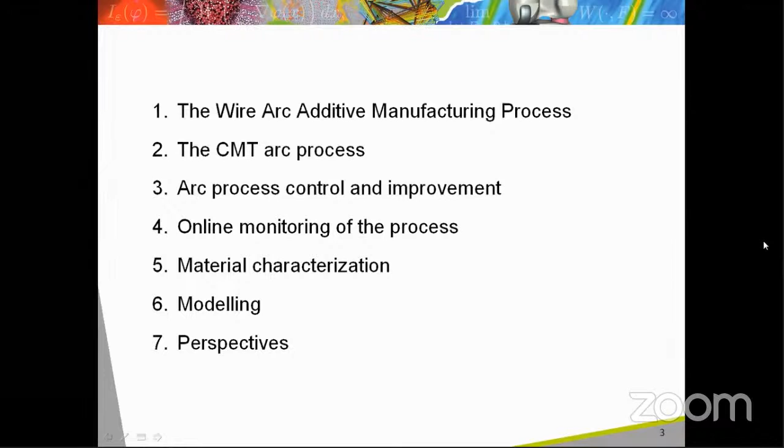So the first part is dedicated to a general presentation of the wire arc additive manufacturing process.

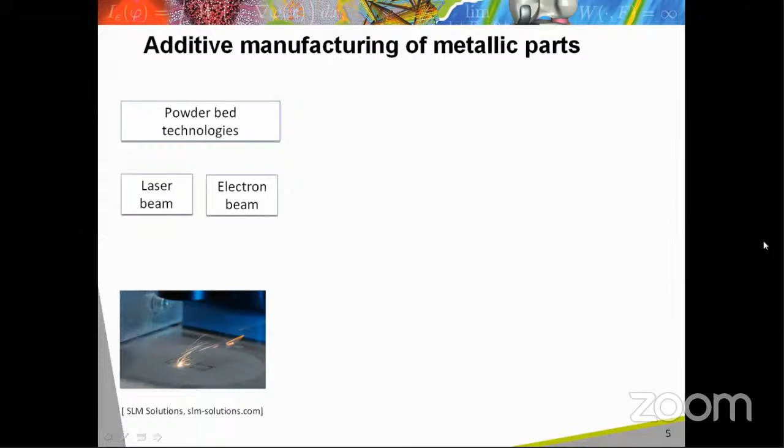Here is a presentation of the main additive manufacturing processes dedicated to metallic materials, classified considering the state of the used raw material and the heating source. The powder bed technologies, based on the deposit of successive powder layers locally melted or sintered by a laser or an electron beam, are probably the most used. Other techniques are based on the spray of powders that are melted by a heat source, generally a laser or plasma.

The wire-based technologies have been less developed so far. With these technologies, a metal wire is melted using a laser, or, in the case of the WAAM process, using an electric arc.

In a general way, the WAAM process does not allow the same precision shapes of the manufacturing components as the powder bed technologies. However, it presents some advantages compared to the other additive manufacturing processes.

First, there is no technical limit to the size of the manufactured samples because there is no manufacturing chamber with it. For comparison, the powder bed technologies are limited to the manufacture of components not exceeding about 400 mm size, and the spray technologies are limited to component size of about 1 meter long.

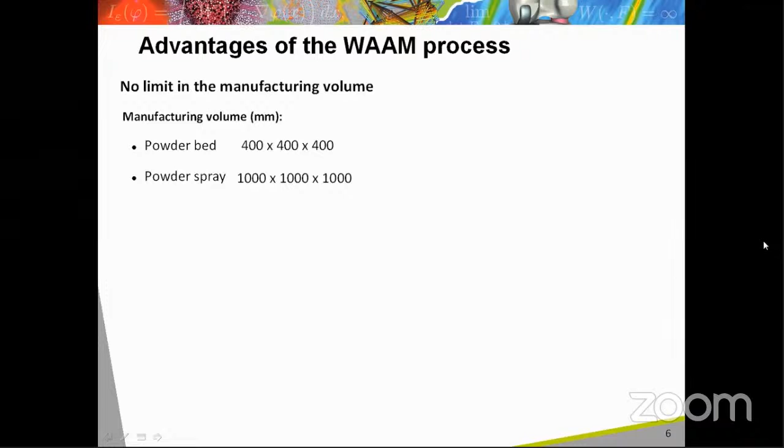In addition, as this process uses the same raw material as the welding process, a great number of material grades are available. The wire raw materials are also less expensive than the powder raw materials.

Finally, the wire arc additive manufacturing process offers some advantages due to the massive shape of the filler metal that does not present the safety problems and the storage problems of the powder-shaped materials that can be easily inhaled or polluted.

One can see on this video the deposit of layers of an aluminum alloy with the WAAM process.

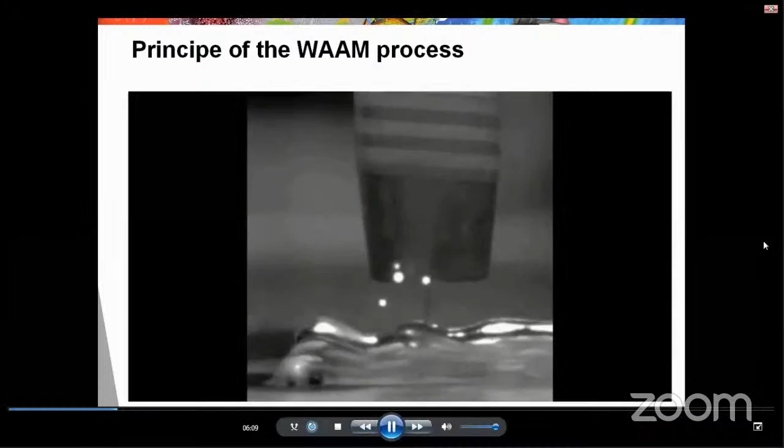The WAAM technology is composed of three main elements: the wire feed device that allows compensating the melting and deposit of the wire end, the arc control process, and finally the 3D positioning or moving device of the deposit head.

As was said previously, the wire feed device and the arc control process in the WAAM process are similar to that used on arc welding processes.

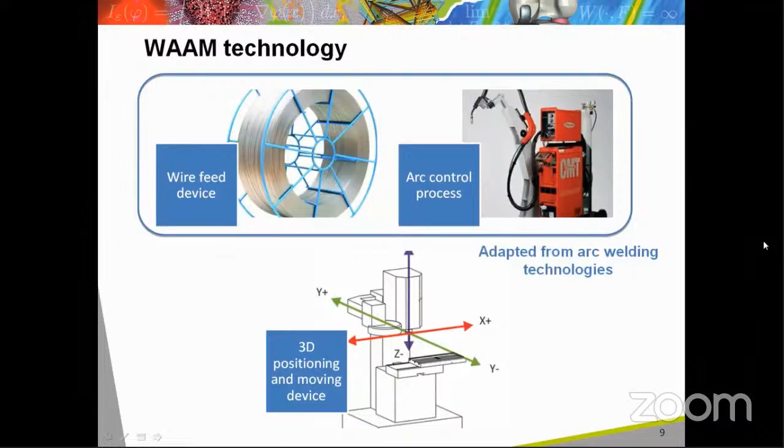In this picture, one can see some examples of components for which the WAAM process is of interest. These kinds of shell shapes are difficult to obtain with conventional processes, or rather costly. So the WAAM process is a convenient process for manufacturing shell structures with complex shapes, having a thickness up to about 10 millimeters, which is the maximal thickness of the layers that can be deposited with this process.

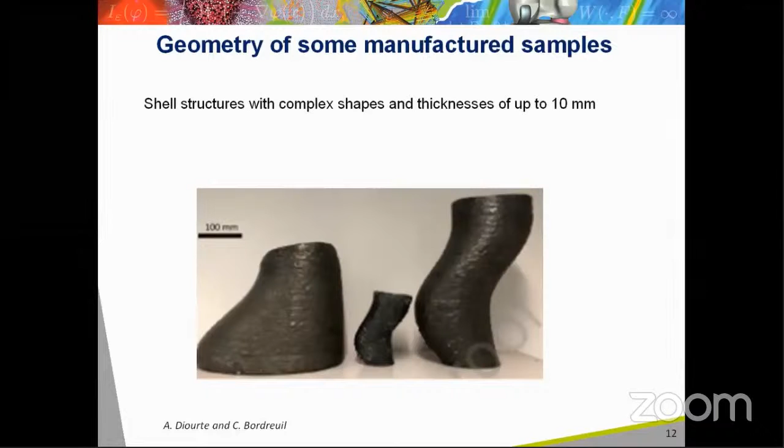I will now present the CMT arc process, which is a welding process retained for our WAAM devices. The CMT process is a derivative process of the classical metal inert gas, or MIG, welding process, also called gas metal arc welding process.

With this process, a filler wire is automatically fed and its end is melted using an electrical arc created between the wire tip and the welded samples by a welding generator.

According to the wire diameter and the arc power, various melting modes corresponding to different metal transfer regimes can be observed. When the arc power is low, the wire tip melts slowly and the wire, which is continuously fed, enters regularly in contact with the melt pool formed at the surface of the welded samples, creating a short circuit and the arc extinction.

This transfer regime is called short circuit mode and is a stable mode because the formed deposits are rather regular. When the arc power increases, the melting of the wire tip is faster and some large liquid droplets are sprayed, producing spatters and sometimes irregular deposits. This transfer regime is called the globular mode.

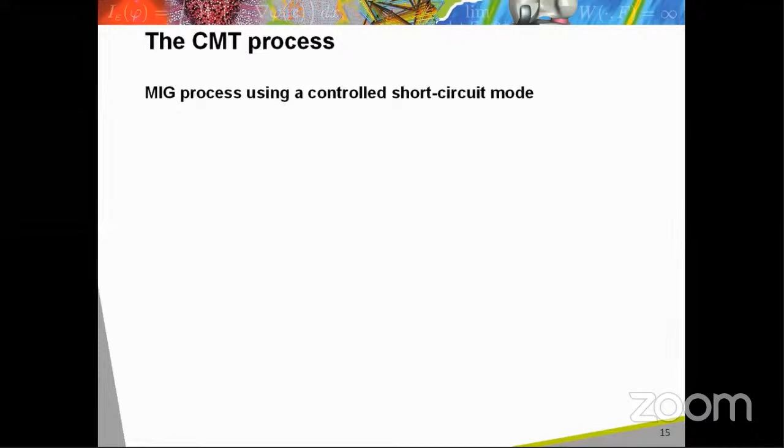This process is considered a MIG process using a controlled short circuit mode. With this process, droplets of liquid metal are deposited according to a regular cycle comprising 4 main steps. The filler wire is fed or retracted according to the step in the deposit cycle.

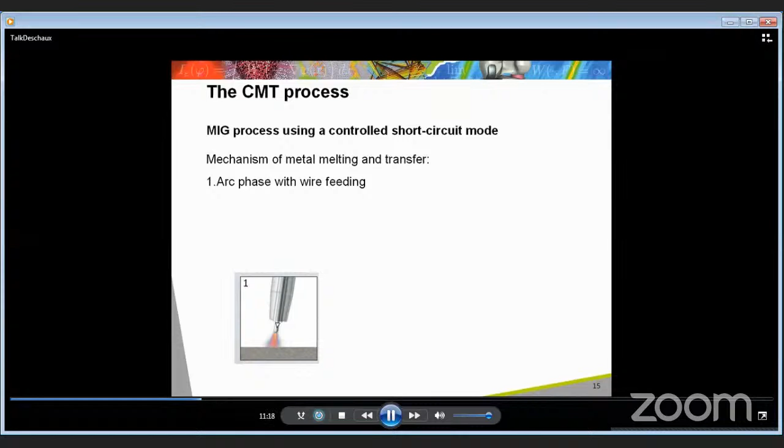In the first step of the cycle, the arc melts the wire tip and the wire is fed towards the workpiece. Then, the liquid drop formed at the wire tip enters in contact with the workpiece surface, producing a short circuit on the arc extension.

In the third step, the wire is retracted up to its separation from the workpiece, leaving the drop of liquid metal deposited to solidify on the workpiece. Finally, the electric arc is reignited and a new cycle begins.

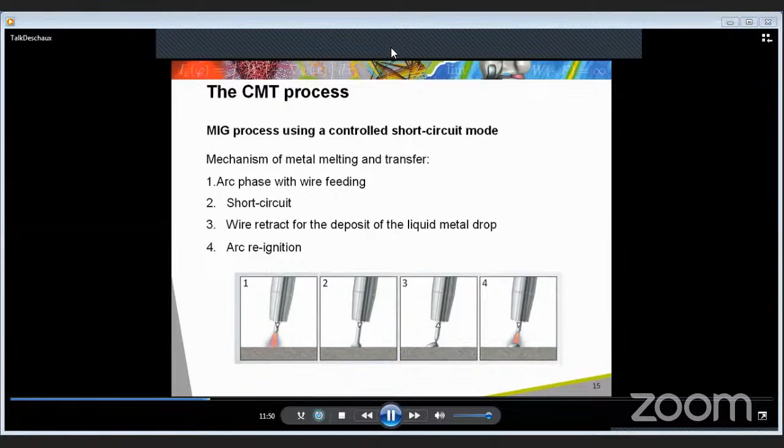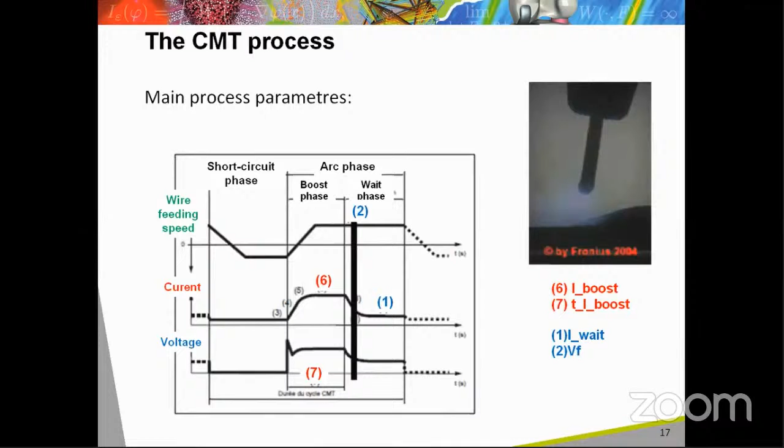One can see again on this slide the 3 phases of the CMT cycle and the main process parameters controlling them. The boost phase is mainly controlled by the boost current, I-boost, and the pulse duration, T-boost. The wait phase is mainly controlled by the wait current, I-wait, and the wire feed rate, VF.

Finally, the short circuit phase is controlled mainly by the short circuit current, ISC, and also by the retract speed of the wire, depending on the feed rate, VF.

I will now present some results concerning the optimization of the process parameters in order to improve the deposit's characteristics.

The optimization of the process parameters requires a good knowledge of the effect of the various process parameters and their coupling on the melting phenomenon, on the liquid metal transfer, and on the spreading on the already formed deposit.

In order to study the stability and regularity of these phenomena according to the process parameters, two kinds of data are recorded during the process. Video recordings are obtained using a high-speed camera.

An ombroscopic technique has been used to observe the deposited metal shape through the electric arc. For that, a halogen light is placed behind the wire tip, allowing observation of the contour of the deposit despite the arc radiation. In addition, the electric parameters, voltage and current, are recorded with a high acquisition frequency to follow the stability of the different phases of the CMT cycle.

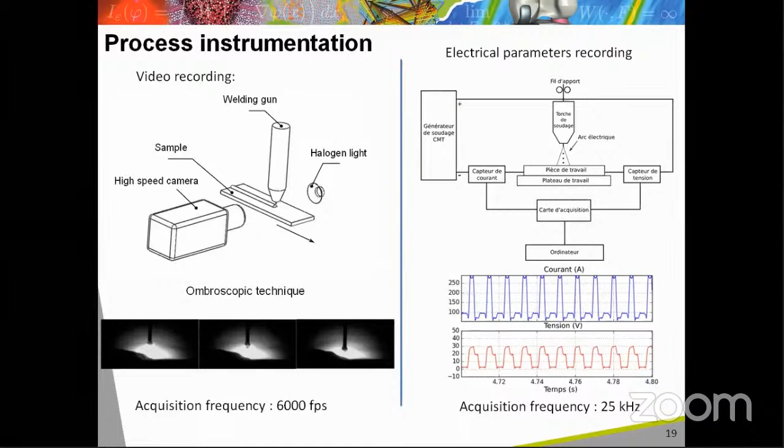The process parameters can act on three main kinds of characteristics of the deposit. First, they act on the geometry of the deposit, which can be evaluated, for instance, by its thickness, its height, but also by the wetting angle.

Secondly, they act on the deposit rate, which can be increased to decrease the manufacturing time. And finally, they act on the stability of the deposit cycle, which can act on the regularity of the deposit shape.

The first example of process parameter optimization that I will present concerns a study focused on increasing the deposit rate. The first option to increase the deposit rate consists of increasing the wire diameter.

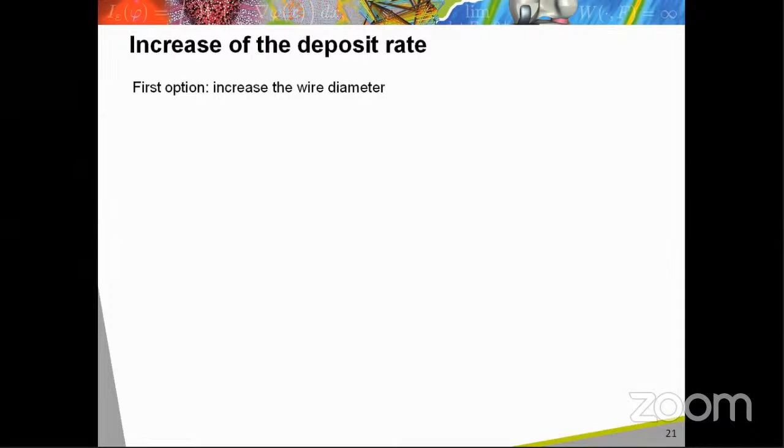For some current materials, the welding devices allow use of wire up to 1.6 mm in diameter. However, these wire sizes are not available for all materials, the standard diameter of the wire being 1 or 1.2 mm. The second option consists, of course, in optimizing the process parameters.

The deposit rate depends on many factors, such as the wire feed rate, the current of the various phases of the transfer cycle, or the duration of these phases. However, two factors were identified as having the greatest influence: the intensity and the duration of the boost phase.

The value of the boost phase current can be changed between about 20 and 300 amperes, and the duration of the boost phase can be changed between 0 and about 10 milliseconds.

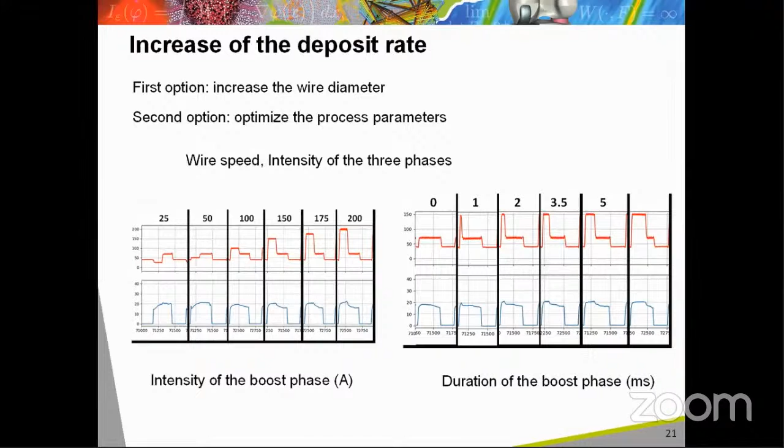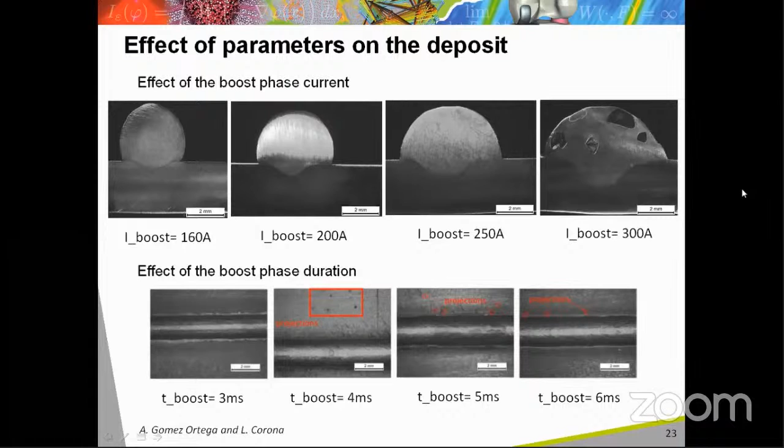Thanks to the optimization of the process parameters, a new synergic point has been added, allowing a deposit rate of more than 4 kg per hour. That corresponds to an increase of about 20% compared to the maximum deposit rate allowed with the pre-recorded parameters.

I will now present another issue that required an optimization of the process parameters. It concerns the reduction of geometrical flaws frequently observed at the beginning of the deposit, mainly in aluminum alloys.

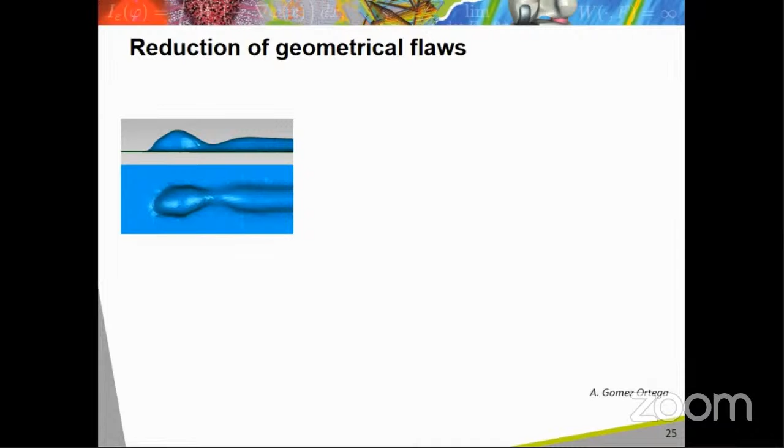Indeed, the pressure variation in the liquid deposit can be expressed with a Laplace equation that indicates the pressure in the liquid increases when the curvature radius of the liquid-gas interface decreases.

At the opposite, when the contact angle is below 90 degrees, then an increase of the bead height produces an increase of the curvature radius, and so a decrease of the pressure into the liquid.

This pressure decrease promotes the suction of the neighboring liquid having a lower curvature radius, leading to the formation of a narrow neck just after the beginning of the deposited bead.

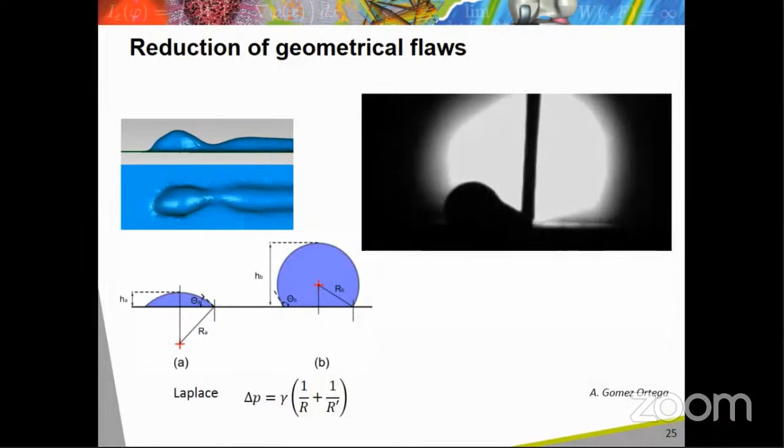This kind of defect can be reduced by improving the wetting of the liquid at the beginning of the deposit. This is possible by promoting the heating of the substrate at the beginning of the deposit using an optimized ignition cycle.

By imposing a high arc intensity during the ignition cycle, small droplets are formed at the wire tip and sprayed on the surface of the substrate. These small droplets produced by a high-power electrical arc have a very high temperature and favor the heating of

the substrate surface before the beginning of the CMT cycles, corresponding to the deposit of larger or less hot droplets. One can see on the video the melting and spray of these small droplets that create a very hot melt pool with better wetting of the substrate before the first short circuit at the beginning of the CMT cycle.

So the optimization of the ignition cycle allows a drastic reduction of the geometrical defect observed at the beginning of the aluminum alloy deposit, as shown on this photo.

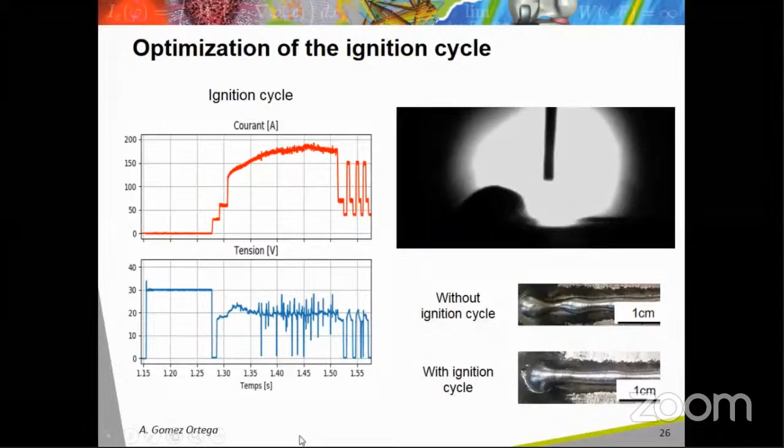The following part concerns some of our research work on the monitoring of the process in order to detect or prevent defect formation. The main goal of this research is to monitor the deposit characteristics in order to be able to adjust the process parameters in case of process deviation.

For that purpose, two kinds of data recording previously described can be used to develop methods based on image analysis or on the treatment of electrical signals of the arc. When a process deviation is observed, two strategies can be followed to adjust the process: the first is to modify the building strategy, adjusting the trajectories of the welding torch; the second is to change the arc process parameters, corresponding to the main CMT parameters previously discussed, or the travel speed of the welding head.

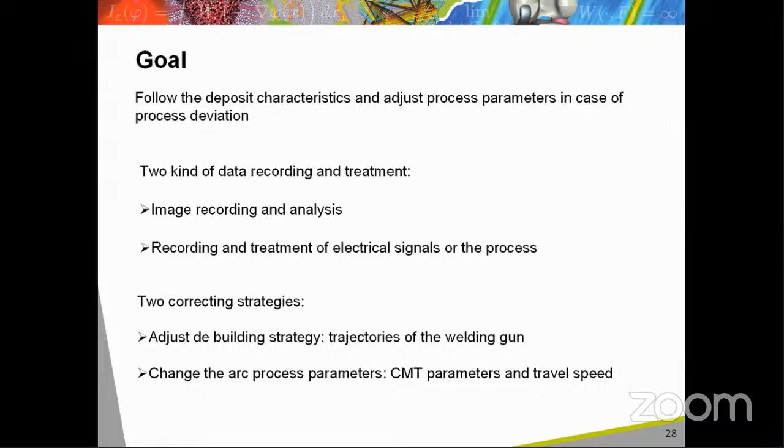I present here a method developed by image analysis to follow online the geometry of filar structures obtained by the superposition of semi-spherical beads. For video monitoring of the process, two cameras are used, positioned as indicated in this picture. The first camera monitors the location of the center of each new deposited bead, and the second is used for contour detection of the surface of each new bead.

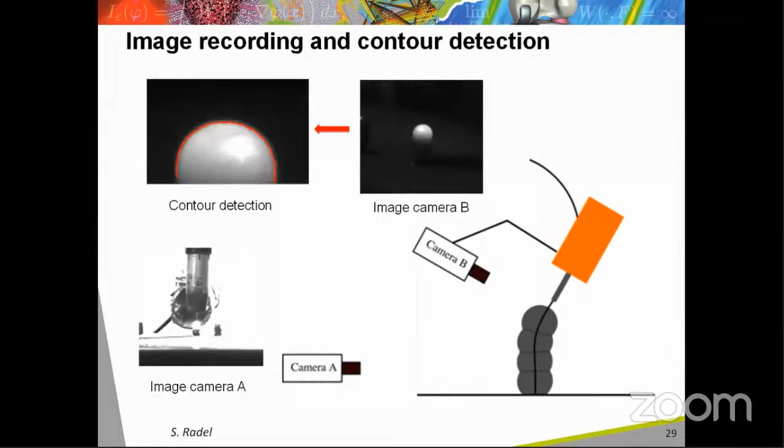Based on this monitoring system, a retroaction loop has been developed to adjust the building strategy in real time. The real bead contour obtained is first compared to a predicted contour, and a real-time retroaction loop has been computed for repositioning the welding gun at each new deposit.

In this video, we can see the real construction and the predicted one for a complex filariform structure. Note that the build speed is greatly accelerated on this video; the real manufacturing time of this component is about 8 hours.

Image recording, unfortunately, is not always a convenient technique, especially for building massive structures, where contour detection is not possible. In addition, the data recorded are often too large for real-time and online control of the process.

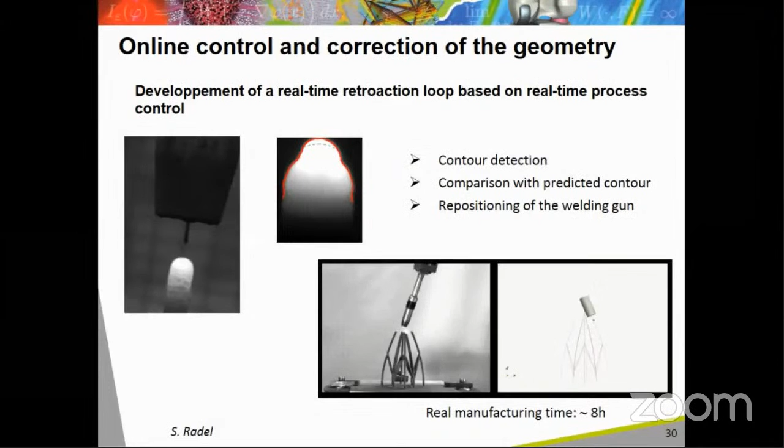A second strategy has been investigated for the online control of the process, based on the monitoring of the electrical parameters of the process. The current and voltage can be easily recorded, and the online treatment of this data is simpler and faster than for image treatments.

In order to try to detect geometrical flaws from the electrical recording, the three phases of the CMT cycle - the boost, the wait, and the short circuit phases - are automatically detected, and some parameters of each phase are computed, such as power, energy, duration, mean intensity, and mean voltage for each phase of each cycle.

These results were compared to the geometry of numerous deposits obtained with various process parameters. This work has shown that some of the computed parameters are good indicators of geometrical defects. In particular, the mean voltage of the wait phase and the duration of the wait phase seem to be correlated to the height variation of the deposits.

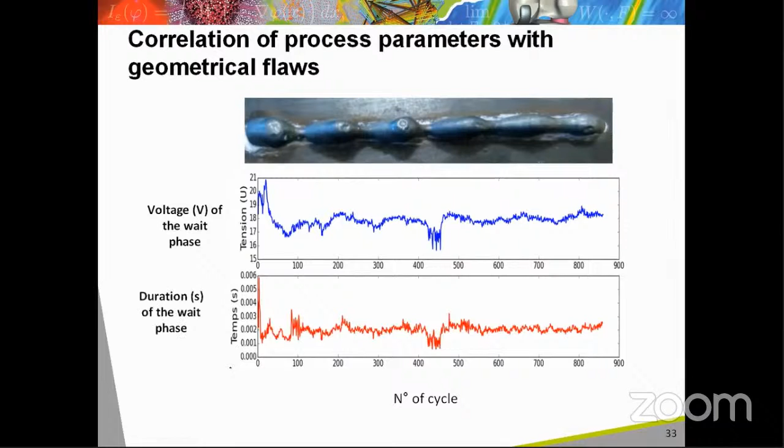These parameters can then be monitored in order to detect geometrical flaws on the deposit and to correct the process parameters when critical flaws are detected. For that purpose, a statistical process control method has been introduced. First, the control limits are defined as the process capability for a stable process without geometrical flaws.

Then control charts are computed to follow the stability of the process. A process is under control when the points of the control chart are inside the control limits. In contrast, a process is out of control when the points of the control chart are outside the control limits.

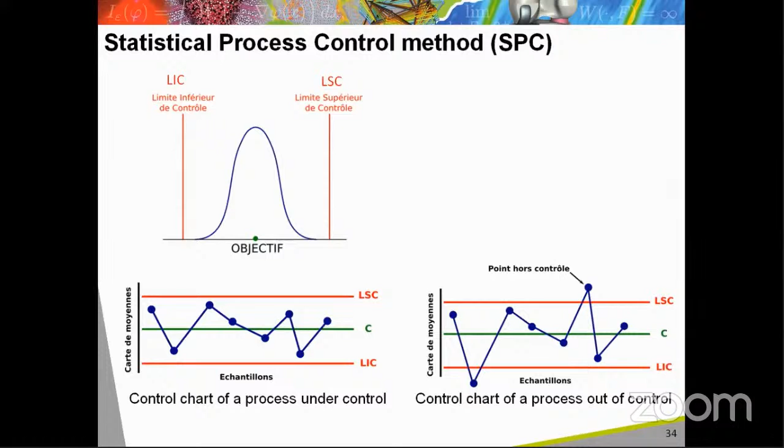This slide shows an application of the SPC method to the monitoring of the deposit of steel beads. Here is a control chart computed for the duration of the wait phase. This control chart indicates a process out of control, with several points of the control chart being below or above the control limits. This result is confirmed by the observation of the irregular deposit.

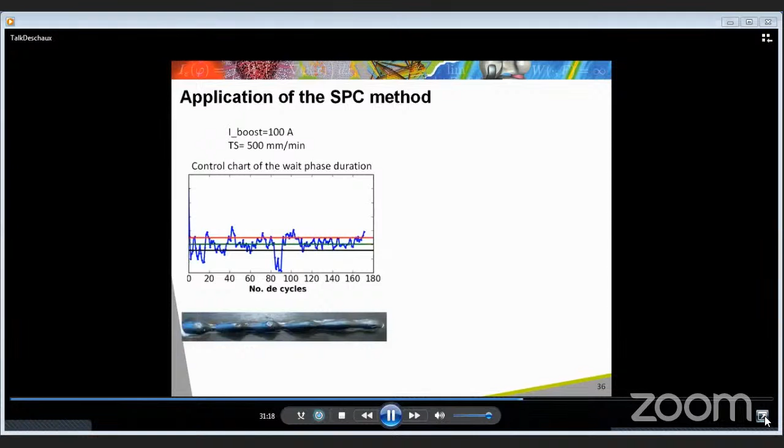This kind of height variation of the beads is generally due to a too-low arc current. For the next deposited layers, the current of the boost phase has been increased to 160 amperes, allowing the regularity of the bead to be improved.

The next section concerns the characterization of the produced materials. The microstructure of the materials obtained with the WAAM process and the corresponding mechanical properties are rather particular.

Indeed, the solidification processes imply specific microstructure and behavior: an out-of-equilibrium microstructure due to the rapid cooling, an anisotropic microstructure due to a directional solidification phenomenon with corresponding anisotropic mechanical behavior, inhomogeneous structures and mechanical behavior, and a low fatigue strength, mainly due to microstructural defects and residual stresses formed during the process. All these factors depend strongly on the process parameters and post-treatment.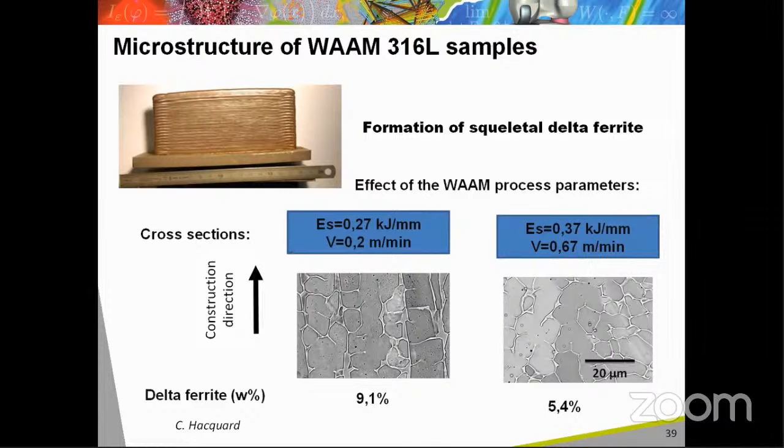The manufactured components in 316L stainless steel can sometimes be used in an as-built state, but generally heat treatments are applied on the components. These heat treatments can be stress release treatments at a temperature of about 550 degrees Celsius, or complete annealing treatments at a temperature of about 1100 degrees Celsius.

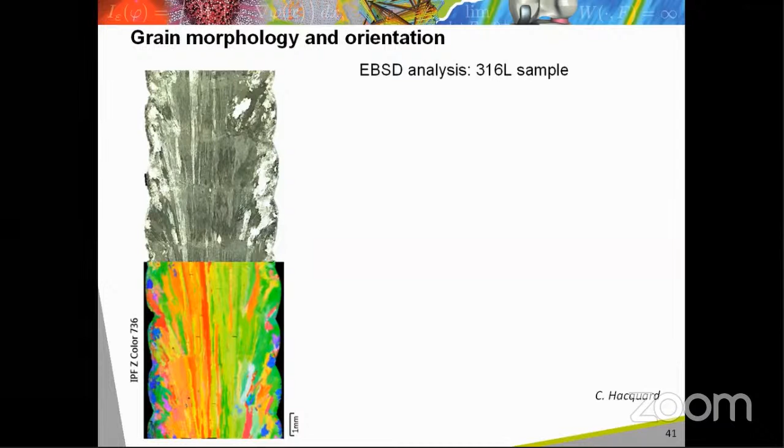Another specificity of materials obtained with the WAAM process is a strongly oriented grain structure. This is because the solidification is highly directional, as the thermal gradient is oriented mainly in the build direction. Consequently, the grains have a columnar morphology, as we can see on the picture on the left side of this slide. In addition, the growth direction for an FCC structure is the 100 crystallographic direction.

The material has a crystallographic texture, as shown in the pole figure obtained from EBSD analysis of the material. One can see on this figure that the 100 crystallographic axis of the grain is mainly oriented in the Z direction, corresponding to the build direction.

This material texture has a consequence on its mechanical behavior. One can see on this slide the tensile curves obtained on samples of titanium alloy TA6V produced with the WAAM process. The tensile behavior of the material differs depending on whether the tensile specimen axis is in the vertical direction, corresponding to the build direction, or in the horizontal direction, corresponding to the direction transverse to the building direction.

In the case of these materials, the yield stress is higher in the horizontal direction and the elongation is lower. This behavior can be correlated to the columnar grain structure, producing a higher strength in the direction of the grain thickness compared to the direction of the grain's length.

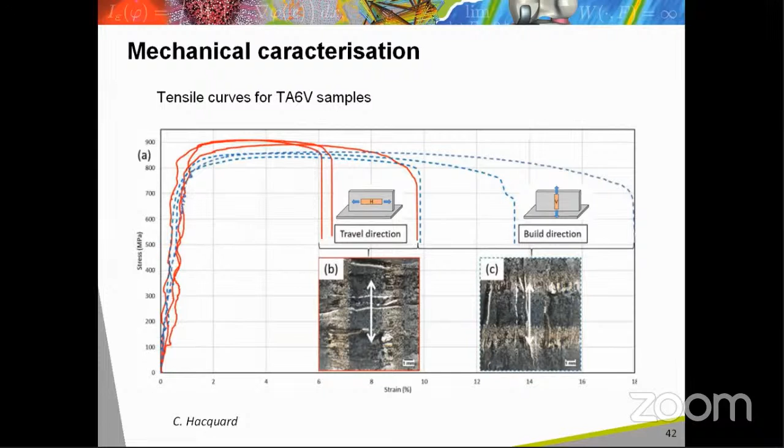In order to better understand the mechanical behavior of such samples, a digital image correlation method can be used. This technique allows comparison of the mechanical behavior of various areas of a heterogeneous sample by following the strain distribution of the sample surface.

Another mechanical property that can be unconventional in WAAM materials is the fatigue behavior. Some first fatigue tests were achieved on 316L stainless steel samples, and only the fatigue limit has been studied for the moment. To estimate this limit, a method based on the measurement of the heat dissipation of samples submitted to a given stress amplitude is used.

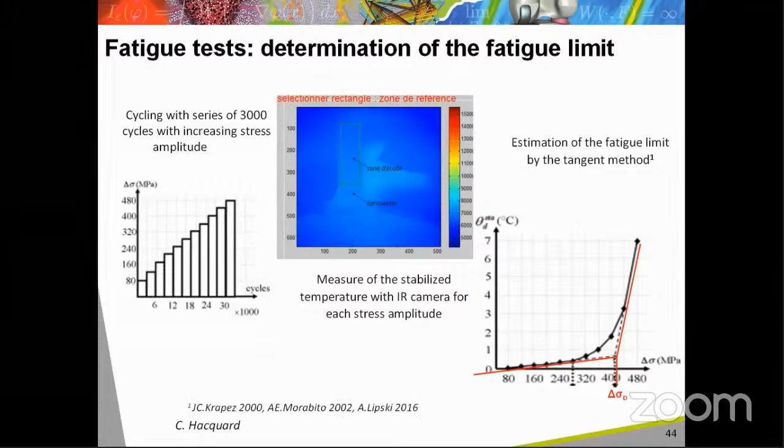The fatigue limits obtained with two WAAM process parameters on samples of 316L were compared. The fatigue limits in the build direction and in the horizontal direction were also compared. The obtained values for the fatigue limits are rather high compared to the yield stress of the material, or compared to some literature data on 316L materials obtained by conventional routes.

Despite a rather large dispersion of the results, one can see that the fatigue limit seems slightly higher on samples manufactured with a lower power. In addition, the fatigue limit seems better in the build direction than the horizontal direction.

Before finishing this talk, I will present some current studies concerning the numerical modeling of the WAAM process. The main goals of this numerical modeling are to predict the material characteristics and to reach a better understanding of the physical phenomena involved during the process.

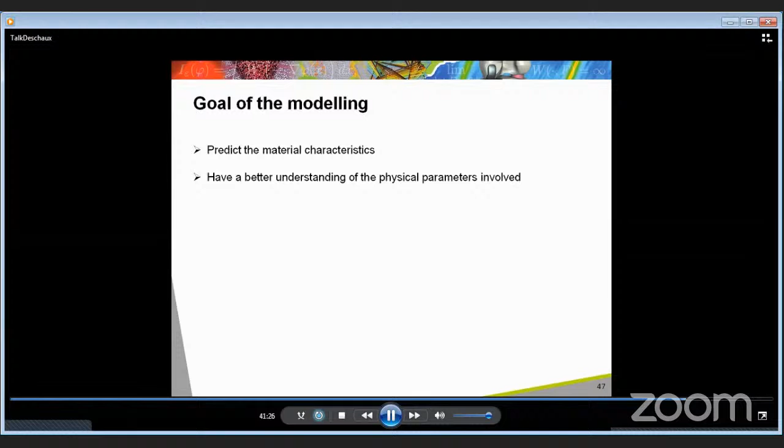Two kinds of results are expected in our current modeling work: the prediction of the formed microstructure in order to predict the anisotropic behavior of the material, and the prediction of the residual stresses and distortions in order to try to optimize the build strategy to reduce the stresses or the distortions.

Here are some first results concerning the modeling of the solidification grain structure obtained on a 316L stainless steel in additive manufacturing. These results concern the selective laser melting process, but the same kind of study is also in progress on the WAAM process with our French partners. For this modeling, the CAFE method is used, which couples a finite element method to predict the evolution of thermal fields during the AM process, and a cellular automata method to model the grain growth during solidification.

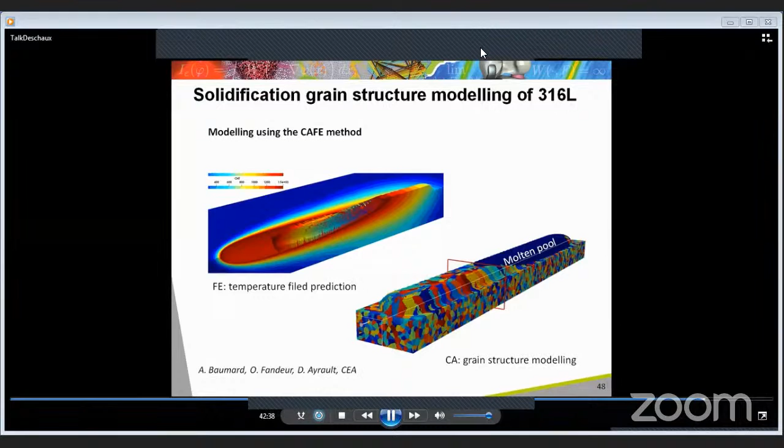Finally, we are also working on the numerical simulation of the residual stresses and distortions produced in WAAM. The main goal of this project is to develop a numerical tool allowing us to optimize the build conditions in order to reduce residual stresses and distortion.

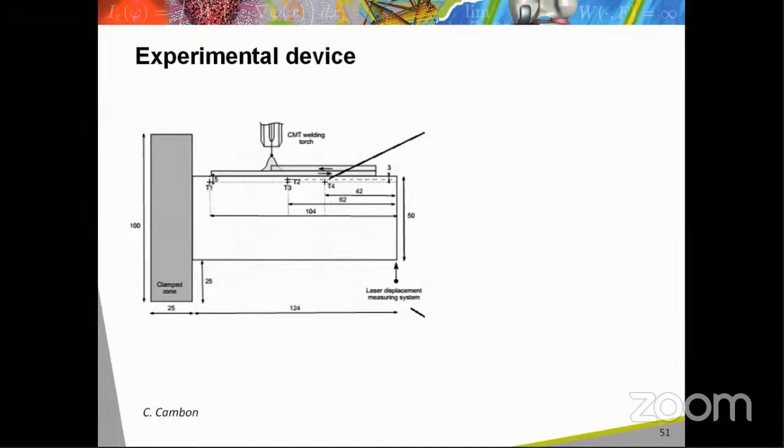To validate the modeling, an experimental device has been developed, consisting of depositing layers to form a wall on the edge of a steel plate. The experimental device is instrumented to measure, during the WAAM deposit, the temperature evolution with thermocouples and the displacement of the plate using a laser displacement measuring system.

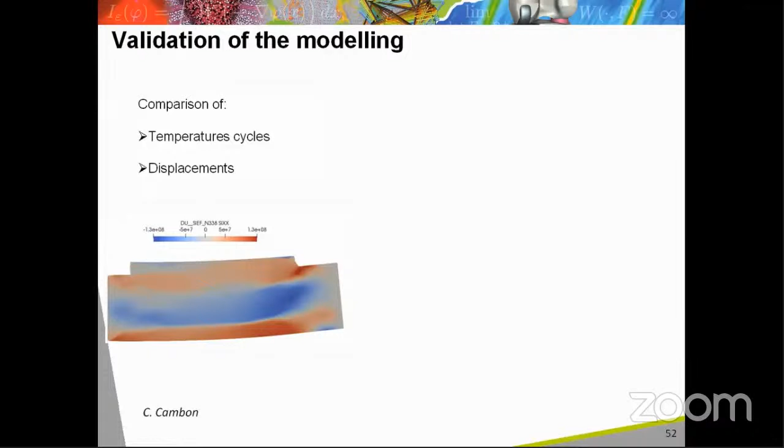In addition, residual stress measurements have been done by neutron diffraction. The validation of the modeling has been done by confronting the temperature cycles and the displacement evolutions predicted by the model with experimental measurements. Finally, the predicted residual stresses have been compared with the results of neutron diffraction measurements.

I will finish my talk with some perspectives of our current works. In the field of process control and improvement, we still need to improve our knowledge of the effect of each parameter of the CMT process on the mechanism of melting of the wire tip and on the deposit of the molten droplets. Concerning the online monitoring of the process, one can consider introducing the control chart method.

This is based on the monitoring and treatment of the electrical parameters in a real-time process, to develop a retroaction loop and correct process deviation.

Concerning materials characterization, it seems important to have a better understanding of the effect of the microstructure and its anisotropy, on the mechanical behavior, and on fatigue damaging.

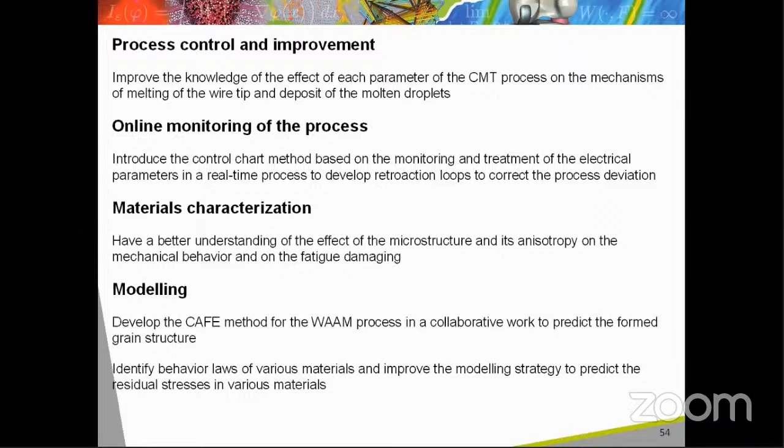Finally, in the field of modeling, we are working to develop the CAFE method for the WAAM process in collaborative work with several partners, to predict the formed grain structure. In addition, we need to identify behavior laws of various materials and improve the modeling strategy to predict residual stresses and distortion in various materials. Thank you for your attention.

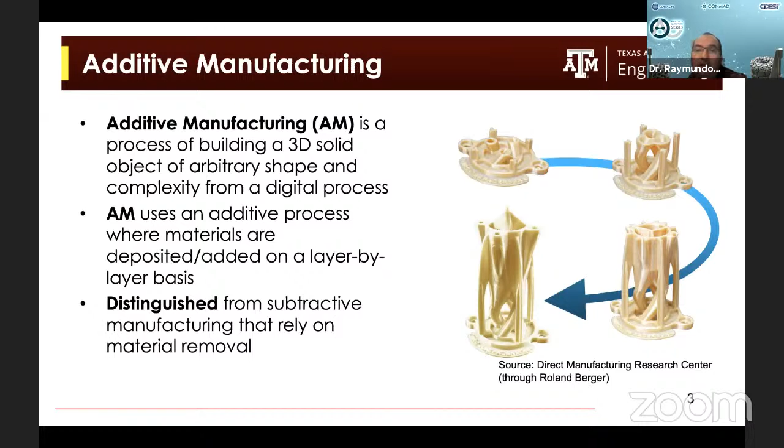Now, AM is distinguished from subtractive manufacturing because the latter requires the removal of material. And of course, when you're doing subtractive manufacturing, you are limited in the type of shapes that you can create, because sometimes there are internal features of the part that cannot be machined using traditional manufacturing processes.

So additive manufacturing has evolved from rapid prototyping to widespread use in some industries. Since the 90s, actually, when I was at MIT, they were talking about rapid prototyping. Some of the earliest printers were developed, or used, at MIT in the late 80s and early 90s. Actually, my advisor, one of his students, did one of the first e-beam printing of Inconel back in 1996 or 1997, if I'm not mistaken. So additive manufacturing has been having increased industry relevance and deployment in a wide range of applications, and it is actually poised to be a dominant manufacturing approach in the near future.

And there are different areas of application where the level of maturity is really high. For example, somewhere I read that in the future, all dental parts are going to be 3D printed. I don't know if all of them are being done by this method now, but in the near future, 100% of dental prostheses are going to be done with 3D printing.

I'm sure the same thing is going to happen with more industries as the case for additive becomes stronger, because they can either do things that otherwise would be impossible, or different additive techniques have been reaching or could reach economies of scale. So there are many benefits to additive manufacturing.

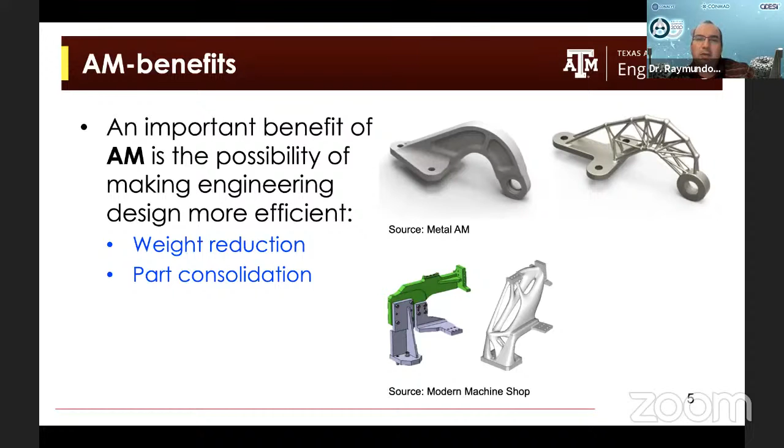The other advantage of additive manufacturing is part consolidation. If you can fabricate a part of complex geometries, you don't need to connect as many parts using joining techniques or fastening. This brings a lot of benefits, including a reduction in inventory if you have a maintenance shop, simplification of the design specifications, control over the parts in a big system, and so on.

Another advantage of AM, perhaps one of the major advantages, is that additional complexity comes mostly free. It's actually possible to fabricate components that otherwise would be impossible with other techniques. The cost associated with increased complexity is marginal relative to the benefit of having this complexity. For example, if you 3D print a jet engine blade, you can potentially print very complex and efficient internal cooling channels that would be extremely difficult to produce via casting.

Another benefit of AM is mass customization. By mass customization, I mean you can create and print objects and parts that are specifically made for a particular application, and you can make many of them. This is extremely important in biomedical applications where you have to print prosthesis to replace bone, for example. Everybody has a different configuration in their bone structure, so in principle you would need custom-made 3D printed bone replacement parts. You couldn't do this practically with other manufacturing techniques, but with additive manufacturing, that is entirely possible.

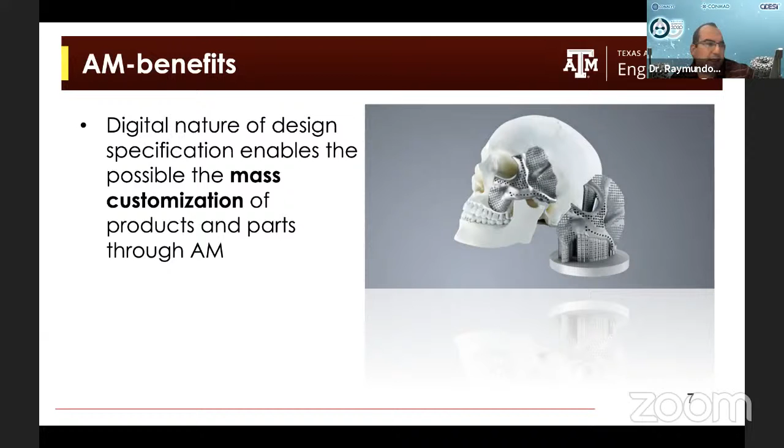The most commonly used ones—although in the morning we listened to a talk on wire-based additive manufacturing—but the most commonly used by industry, and the ones mostly investigated in a university setting, are powder bed fusion and directed energy deposition. I bring them up because these are the manufacturing technologies we're actually using to do our work on 4D printing and functionally graded materials.

In the case of powder bed fusion, as you all know, you have a point heat source, and this heat source could be a laser or an electron beam. This source selectively fuses or melts a region of the powder bed. As the heat source scans a given layer, you create a geometry in that layer, and then you build a three-dimensional object by dispensing more powder, rolling into a layer, and then selectively melting or consolidating the powder using the heat source.

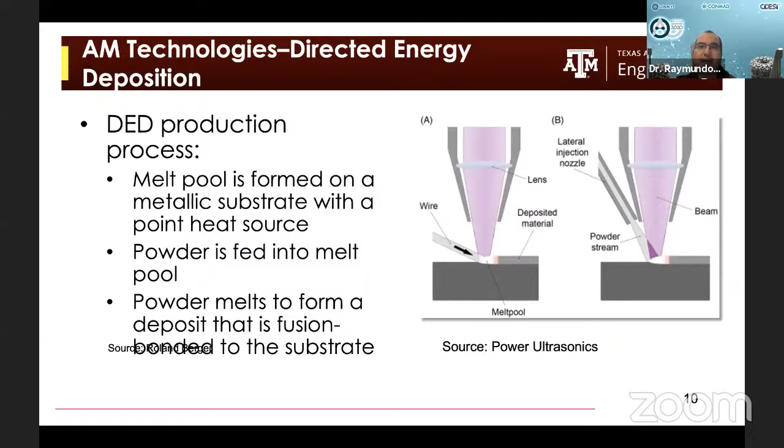Now, in terms of benefits for additive manufacturing, you can create very geometrically complex parts that otherwise would be impossible to make. You have flexibility in design, and you can do mass customization. You can do part consolidation to eliminate inventory problems and make the specification of a component or system more simple.

And of course, you have the advantage of saving material and saving weight by truly optimizing the shape, so you only use material where you need to carry load. Now the question here is, can 3D printing actually do more than that?

If we look at synthetic materials, they are kind of primitive. They're monolithic, they don't have a lot of hierarchies to them, and they are really limited by the manufacturing process. The standard forms that people in industry use are rods, bars, plates, and from these design primitives, people do bending, welding, joining, drawing, etc., to try to make more complicated parts.

But most synthetic materials tend to be boring in the sense that even when you talk about architected materials that have some macro structure beyond the microstructure, these motifs tend to be regular and repeat themselves in three-dimensional space. This is how materials of the 21st century look, at least the ones we use to build things that are macroscopically observable.

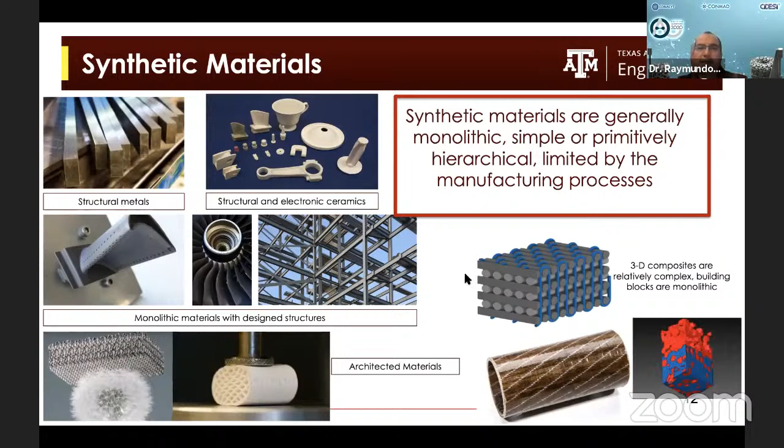On the other hand, if you look at natural materials, if you look at bone, for example, it has a wide range of scales, and each scale is configured in a very specific way to maximize load carrying while minimizing weight.

There are other types of biomaterials, for example, the mantis shrimp claw, that is extremely tough, made with the same long chain protein, but this protein is arranged in many different hierarchies of scale in a very interesting way to produce extremely tough structures.

And if you look at all kinds of different biomaterials, you see that they are extremely complex, extremely hierarchical, very efficient. This is something we don't have with synthetic materials, right? We cannot engineer a metamaterial or architected material to have more than a couple of scales at most. So the question now is, can we actually go beyond shape complexity in the context of additive manufacturing?

The current value proposition of AM is highly customizable products with complex shapes that either make the design process more efficient or enable designs that otherwise would be impossible. Yet these underlying 3D printing technologies could potentially be leveraged to achieve much more, and this is what I call 3D plus printing, or beyond 3D printing.

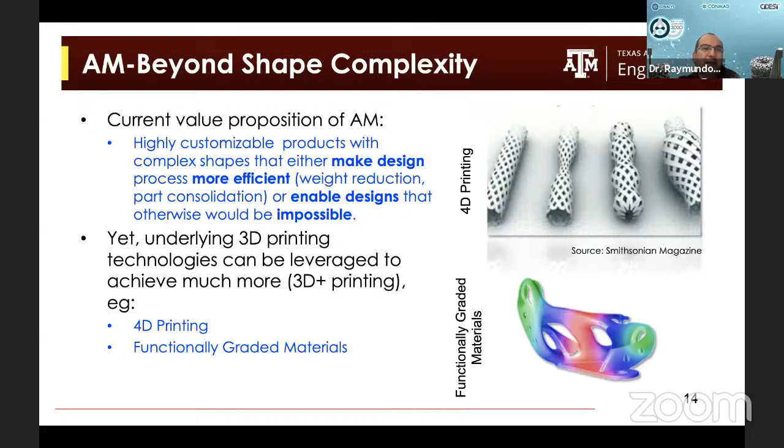In this talk, I'm going to talk specifically about things we have done in my group in collaboration with my colleagues, Alaa Elwany, Ibrahim Karaman, and Rich Malak, that have to do with 4D printing or functionally graded materials. So I'm going to talk a little bit first about what we're doing in 4D printing.

4D printing, for those who are not familiar with the term, is basically about additively manufacturing structures that can change their form, property, or function with time under stimulus. So you have a three-dimensional object made with a material that responds to light, change in pH, temperature, magnetic field, or stress.

And when the material undergoes this change in structure or conformation under the stimulus, it's going to change its configuration macroscopically, meaning you're going to have something that changes shape with time. Of course, 4D printing expands the potential of 3D printing by providing more degrees of freedom to engineering design.

Here we have what is probably the first and most famous paper on 4D printing, by Tibbits at MIT. They made this object out of a shape memory polymer.

By doing a very clever way of organizing the design and fabrication of this polymer, they were able to create objects that change shape as soon as you change the stimulus. I must be frank, I don't remember what change in stimulus was here, probably pH or temperature or something like that. But this was a very interesting demonstration of the concept of 4D printing.

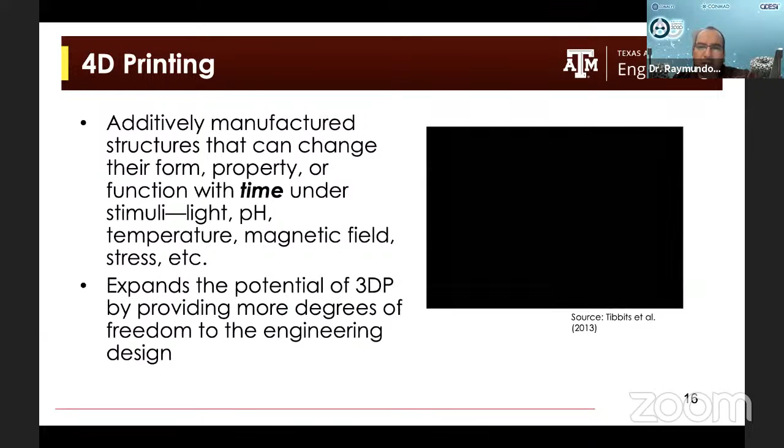To date, 4D printing has mostly exploited stimulus-responsive soft materials, right? These are polymers or liquid crystals and so on. You can see here many different applications, from origami, that is objects that start with a two-dimensional conformation and then arrange themselves into a three-dimensional shape, smart packaging, meta materials. They have been used in biomedicine, tissue engineering, smart devices, and so on.

The type of materials could be single shape memory polymer, shape memory polymer composites, multi-materials, etc. The type of stimulus goes from photo stimulus to thermal, temperature, water, pH, chemistry, magnetic field in the case of shape memory polymers that have embedded magnetic particles. And there are a wide range of techniques that have been used to print these objects.

Most of these stimulus-responsive soft materials have been shape memory polymers, which are polymers that undergo reversible shape changes or conformation changes when you apply different types of stimulus. There's a lot of activity on shape memory polymers around the world. I think that in the context of shape memory polymers, 4D printing is perhaps one of the most interesting technologies that has increased the potential of shape memory polymers dramatically.

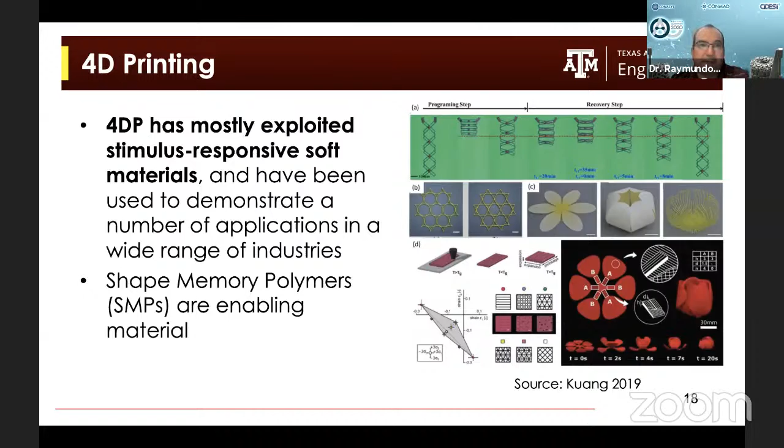Now what about metals? I mentioned shape memory polymers. In metals, we have something called shape memory alloys. These are metallic alloys that undergo large recoverable strains as a result of reversible martensitic transformations.

Martensitic transformations are transformations that are not diffusive. In this case, what happens is you have a crystal structure, you have a martensite, and then when you increase the temperature, you go to austenite. So you have only lattice level changes in the structure. You change the crystal symmetry of the structure, right? And these transformations are reversible. That means that you can go back and forth between one state and the other state.

These transformations can be triggered by stress, temperature, magnetic field, or a combination. So shape memory alloys have been known for the past 70 years. I think that the first one was discovered in the Naval Research Lab, which is nitinol, nickel titanium, in the 1950s. And since then, there has been a lot of research on shape memory alloys, and there have been some applications that have already been enabled with these materials.

These materials, and what makes them unique relative to shape memory polymers, is the fact that they can withstand significant loads while undergoing the transformation. This is orders of magnitude more load than what you can do with a shape memory polymer. They can withstand extreme environments. There are high temperature shape memory alloys that operate at temperatures way above the capability of any polymer material. So you can use shape memory alloys to actuate aerospace components, for example.

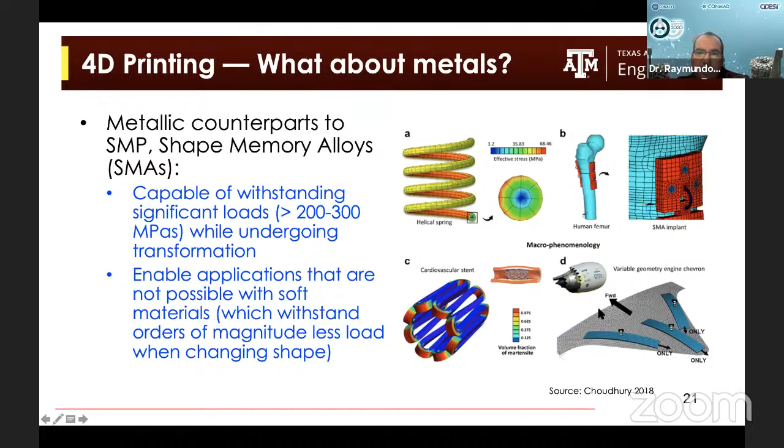An interesting thing about shape memory alloys, and the reason why they work, is because these are materials that are on the verge of stability. They are barely stable, right? And this is why it's very easy, quote unquote, to move back and forth between one state and the other state. So these are very, almost metastable materials. They are on the verge of instability. And any material that is almost unstable, or becomes unstable under some conditions, may be very sensitive to chemistry or conformation.

This applies to shape memory polymers as well. In the case of shape memory alloys, they are extremely sensitive to changes in chemistry, right? So for example, here I have a plot of the transformation temperature of nickel titanium. This is the nitinol alloy as a function of nickel amounts.

You can see how the transformation temperature changes from 340 Kelvin at close to 50% nickel. As soon as you go to 51% nickel, changing the composition by less than 1 atomic percent, the transformation changes by 140 degrees Kelvin. So this is an extreme sensitivity to composition.

There are alloys like nickel titanium hafnium where this change is 3 or 4 times larger. You can change the transformation temperature by 500 Kelvin by changing the composition by just 1 atomic percent. The same thing applies to microstructure.

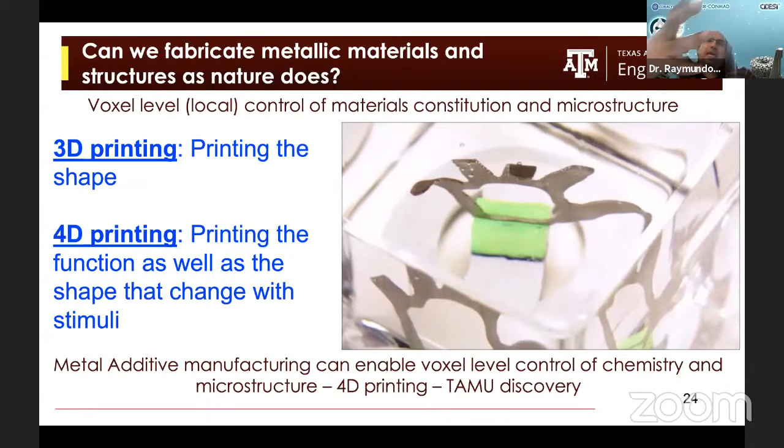So there's a potential here. We could create a monolithic part that would act like a robotic material, where you could have grips or different actuations at different temperatures just by controlling the conditions in which you print different elements of the part. So with metal additive manufacturing of materials very sensitive to changes in chemistry and microstructure, you can actually do 4D printing of metals.

Now the question is, what happens when you 3D print these metals that changes their behavior in such a dramatic way? This is just a still of the action sequence, so you can see the dramatic change in conformation that goes on when we heat up this 3D printed hand.

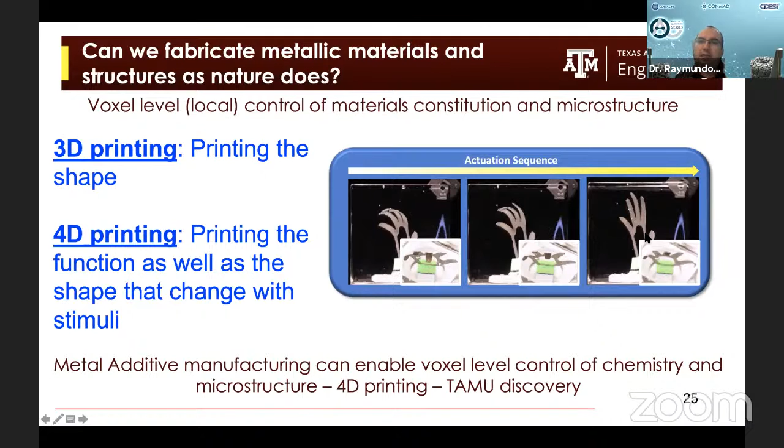What we envision here is to look at materials as devices through 4D printing. What we want to do is specially tailor additive manufacturing so we can have robotic materials in which hierarchy, multifunctionality, and location specificity are considered concurrently during the design process.

So we know this happens because we were able to do it, but that doesn't mean we understand how to do it, and it doesn't mean yet that we can actually design 4D printed components. The fact that we know 4D printing works in the case of metals doesn't mean we are equipped yet to actually design 4D printed objects.

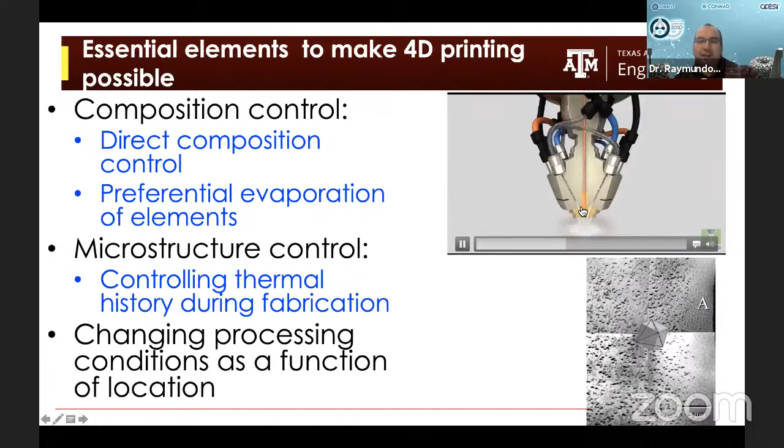So the essential elements to make 4D printing possible are composition control. We could potentially use DED to deposit alloys with slightly different compositions, or we can exploit the fact that different elements have different vapor pressures.

You may be familiar with this problem in additive manufacturing: the final composition doesn't match the initial composition of the alloy, because if the elements have a very large difference in vapor pressure, you evaporate some elements more than others, and that changes the chemical makeup of the part.

That could be a problem, but it could also be something that you can use to your advantage, particularly when materials are very sensitive to changes in composition. And of course, you can also control the local microstructure, and with that, you can control microstructural processes that change the transformation behavior of these materials.

So what we want to do, and we haven't achieved this yet—this is from a proposal we wrote that wasn't funded, but we're trying again—is to go and do topology and shape optimization, then figure out what type of chemistry changes are needed to get a particular shape memory response. We then proceed to do process optimization: for a particular alloy, we want to figure out the region in which we can print parts without defects, and we want to do this within a robust framework to make sure we can do it in a repeatable way.

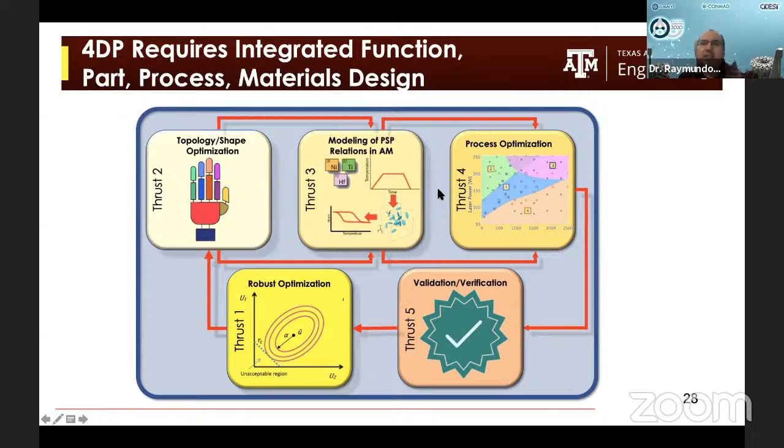For example, process optimization. In collaboration with my colleagues Alaa Elwany and Ibrahim Karaman, we developed a very simple recipe based on the combined use of thermal models and machine learning frameworks with statistical calibration, to rapidly identify the printable region in a particular alloy class.

So we have a thermal model, we predict an initial printability map, we carry out single track experiments, we calibrate the models. Now that we have calibrated models, we revise the printability map to figure out where the regions are where you're more prone to keyholing, lack of fusion, or balling, in the case of powder bed fusion.

And then we print—this white region is the good region. We print parts in this good region, and then we carry out characterization of the printed tensile specimens. In the case of nickel titanium, this is how it works. We found the printable region, then we printed some elements, some coupons, in these different printing conditions, and we were able to verify that they had no porosity and had good super elastic behavior.

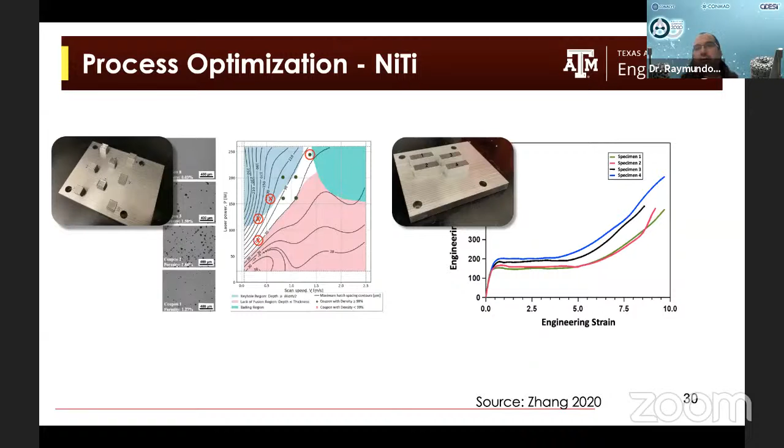Now we know how to find the sweet spot in processing space. So then we can, for example, tailor the process conditions for the printing.

But to do that, you actually need to build a lot of computational tools. It is not sufficient to just do experiments, because there are many things you can change at the same time when doing 3D printing. And even though modeling isn't perfect and there are a lot of uncertainties when using computational tools, they aren't completely wrong, and they can potentially be used to build predictive models that tell us what happens when you change conditions related to the chemistry or microstructure of the material we're interested in.

So what we want is to build a framework for predictive analytics for additive manufacturing, where every single aspect of the fabrication process has a computational tool to look at it, but also has an experimental counterpart that we can use to verify and calibrate the models we use.

Just to give an example, this is the first step. This is work that was recently finished by one of my students, and we're about to publish it. We have a thermal model, developed by the Air Force Research Lab, that allows us to predict the local thermal histories as you scan a part.

And then, when you have these thermal histories, we go from them to a model that takes into account the thermal history and the chemistry to account for the differential evaporation. And of course, this thermal model is calibrated using experiments.

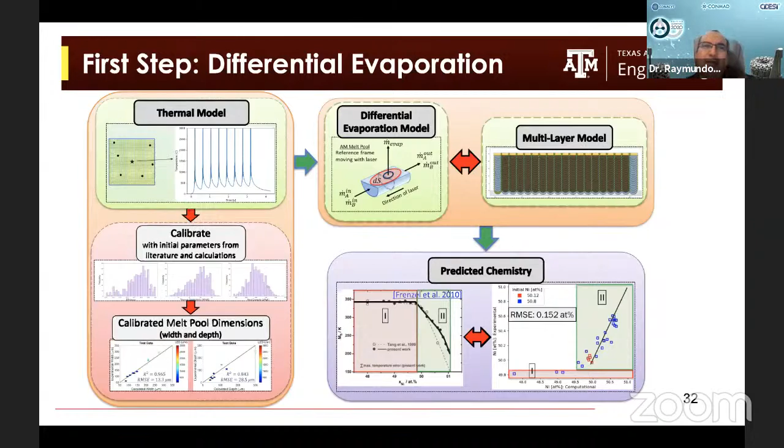Okay, so this is just one step in the process. Actually that will be the second step; the first step will be the process optimization here. The second or third step will be exploring differential evaporation, and by using different parameters like power and velocity or hatch spacing, we can potentially arrive at different chemistries and different transformation temperatures. But the missing step, what we haven't done yet, is to actually integrate the process optimization and the materials modeling part with an engineering shape or topology optimization to try to start doing 4D printing.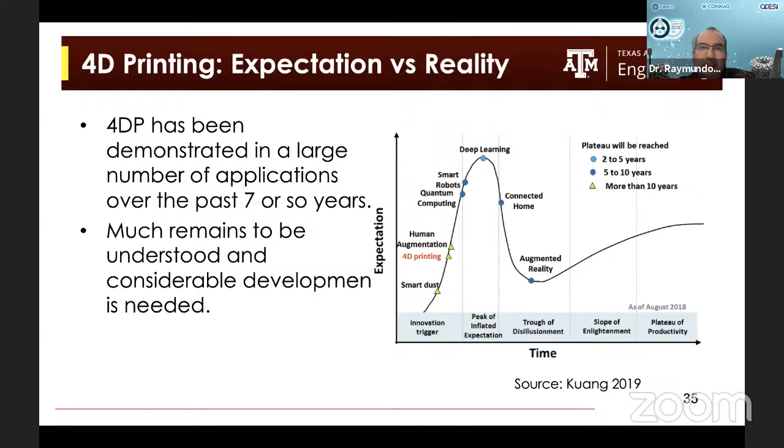We are in 4D printing, we are here. 3D printing, we are probably here in this region. But in 4D printing, much remains to be understood, and considerable development is needed. But if it's possible, we can do a lot of really cool things that would expand what we can do with engineering. Okay, so this is the first part of my talk.

I think I'm almost on time. I may be running a bit late, but I think I will be able to finish on time.

Now I'm going to talk about functionally graded materials. This is another expansion of 3D printing made possible by additive manufacturing technologies. The research vision is to actually create a computational methodology to design compositionally graded alloys with an arbitrary number of constituent elements that satisfy specified constraints and optimize design objectives. So what we want to do is, now that you can do topology optimization, wouldn't it be cool to change the properties of different parts of an already topology-optimized component to improve its performance? Maybe this part faces very high temperature, so you need a temperature-resistant material here, and here you have to withstand a lot of load, so you may need a very strong material. There's no reason why, if you're already doing this topology optimization, we shouldn't change the properties locally of this geometrically complex part. Okay, now there are gaps.

In the case of metals, for example, linear gradients do not work, and the reason why they don't work is because whenever you try to connect two points in a composition space, it is very likely that if you connect them with a straight path, you're going to find phases that are detrimental, that are going to make the part brittle. And also, design methods are very limited.

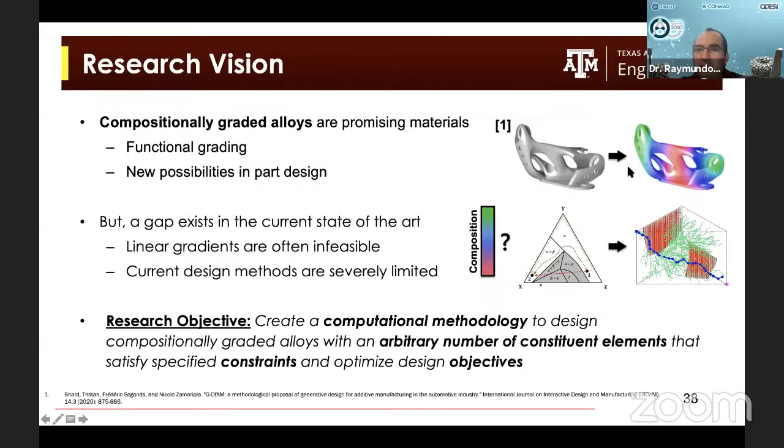There are no design techniques to use if we want to actually do this. So functionally graded materials are known as materials that change properties along spatial dimensions, and they're usually used to achieve contradictory performance requirements. For example, lightweighting, as I said before, with high temperature performance. There's already a lot of work on functionally graded materials, blended polymers, metal matrix composites, and so on.

The bone itself is functionally graded, right? So the bone changes density, for example, as you move from the very center to the outer parts of the bone, to carry the load more efficiently, okay?

So we can do functionally graded or compositionally graded alloys with DED. The only thing that we need to do is use a DED that actually has multiple powder feeds, right? So we can potentially change the feeding rate of different compositions or different powder sources. And if we change them gradually, we can actually change the composition in a gradual way.

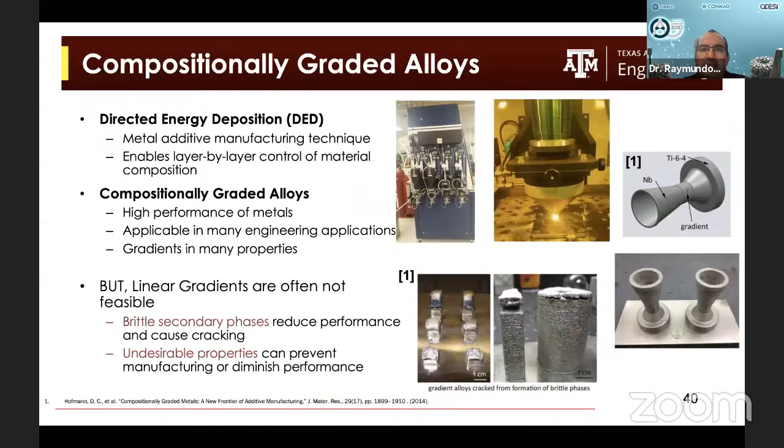The problem, however, as I said before, is that you may actually have brittle secondary phases, or you may have undesirable properties that can prevent manufacturing or diminish performance, okay? So the previous design methods - this is kind of new, well, not that new anymore - the first papers on compositionally graded alloys were published in 2014.

Most attempts have failed because if you want to do these paths in a linear way, most of the time you're going to encounter things that are brittle, so your part is going to be brittle. But there have been many approaches. Most of them are very primitive, and they don't really allow you to design with multiple components at the same time, okay?

So what we thought of doing in this case was to actually treat the problem as that of motion planning. We imagine that we have a beginning and an end, and then we thought of looking at each composition as a robot that needs to find its way in a multidimensional space in order to avoid some obstacles or satisfy some constraints, okay? So essentially, we mapped the problem of functionally grading as that of motion planning or robotic path planning.

And the idea was we are trying to go from this point to this point. We're going to try to avoid some obstacles, and we're going to try to make sure that we optimize a particular cost function. This cost function could be cost of the material, it could be the length of the path, etc. So the idea was, can we actually map this design problem to a motion planning problem? And if that is the case, how do we build the algorithm to do it, right?

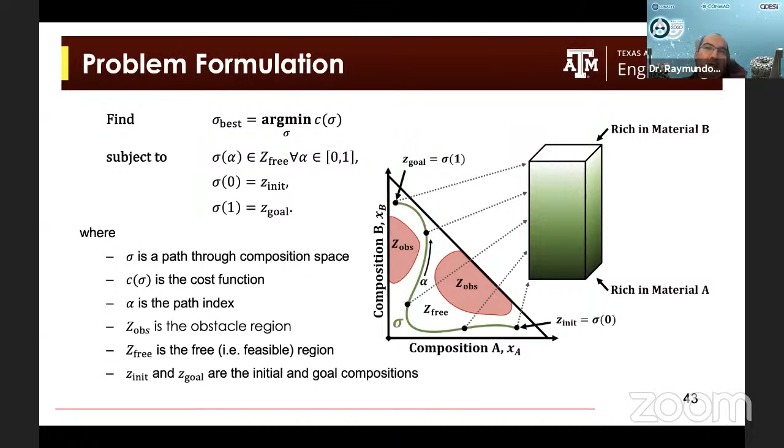So what we did was, the first approach was to actually use computational thermodynamics techniques to sample the thermodynamic space, then use a classifier to classify regions that were obstacles that were not interesting to us, and then use a path planning algorithm to find an optimal path that would take you from one point to the other, in a way that is automatic and that you don't need to do a lot of hand calculations or experiments, okay?

There are many different types of path planning algorithms. You can use neural networks. You can use traditional optimization. You can use graph search. Graph search is basically used for mapping applications like Google Maps or Apple Maps or Waze or any other type of mapping technology.

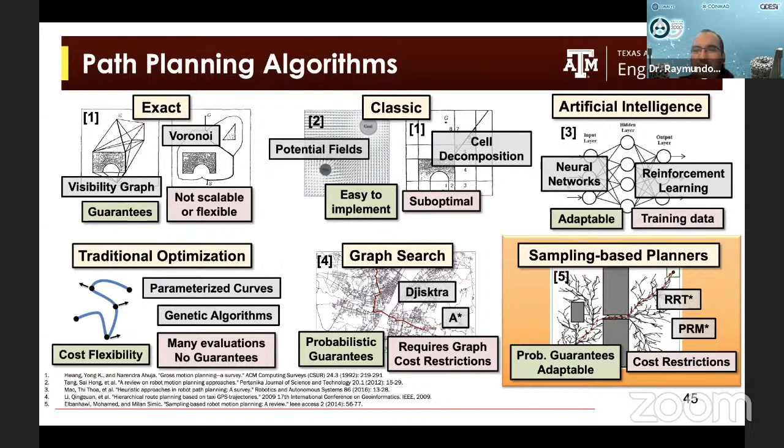We decided to use, instead of these methods, sample-based planners because they are probabilistically guaranteed to work, and they need less memory and less training data than other techniques. So specifically, we use something called rapidly exploring random tree. And this rapidly exploring random tree is a path planning algorithm that allows you to explore or find paths in multiple dimensions.

But for this algorithm to work, we actually have to provide models for the obstacles and to calculate the cost of a particular path. I will not go into detail into how this works, but you're basically sampling this multidimensional space in order to find a viable solution. And once you find the path that connects the initial and the endpoints, then you can optimize around that path, to minimize a particular cost or maximize a performance metric, etc. So the constraints are hard requirements in terms of the state space.

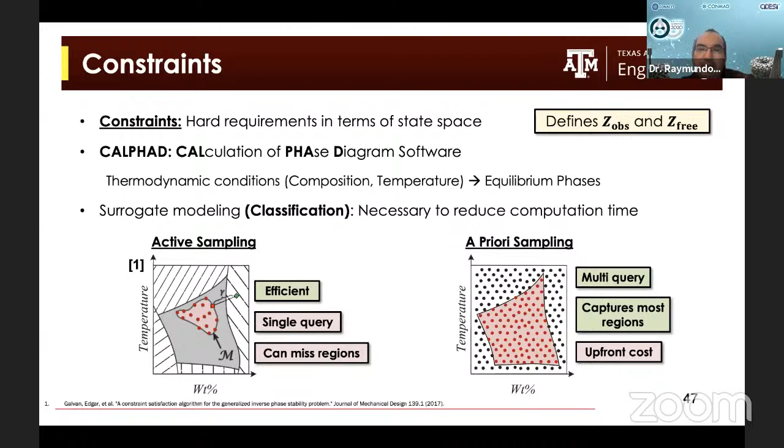That is, things that you don't want to see in your path. So what we do is use some sampling schemes, in particular surrogate models and classification, to tell the path planner: don't go there, avoid this region, this is an obstacle. So we could guide the path in an effective way. The objectives could be to minimize the path length, clear the obstacle by a distance, or optimize a particular property or performance.

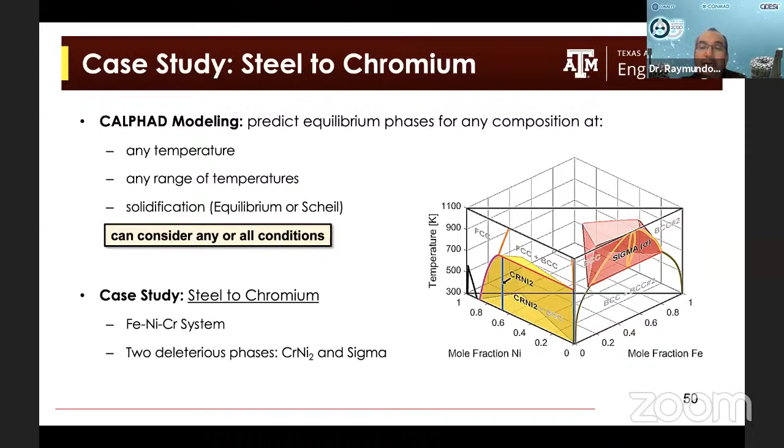One of the main objectives was to verify that we could avoid obstacles using our path planning framework. This is just one example; we have done many since then. In this case, we tried to find a path between steel and chromium - a 316 stainless steel, which is an iron-nickel-chromium alloy, to pure chromium. We considered that we didn't want to see chromium-nickel-2 and sigma phase; we consider those two phases deleterious. The task was to find a path that could clear those obstacles at all temperatures and be free of cracks if we were able to build it.

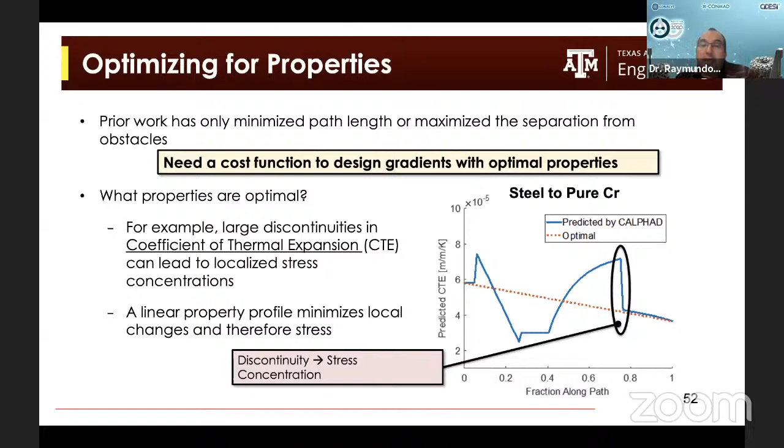Now, prior work by us was only minimizing the path length or maximizing separation from obstacles, but there are problems with properties. For example, if you plot the thermal expansion coefficient of this path going from steel to pure chromium, it turns out the thermal expansion coefficient changes by a lot as you move along the path. Changes and discontinuities in the thermal expansion coefficient can lead to thermal stress concentrations, which can compromise the integrity of the part. So the question was: can we do something to minimize these drastic changes in properties while also avoiding detrimental obstacles?

Essentially what we wanted to do was find ways of printing a path that avoided obstacles but also ensured that properties change monotonically. Monotonic means the change is always in one direction - as you move along the path, you cannot go up and down in a particular property value; it should only go down or up as you move along the path.

It turns out there is something called the monotonicity index, and it's very interesting - my student found this metric in a paper in a journal of economics. Two economists were looking at a particular change in an economic variable over time, and they wanted to measure whether this change was monotonic or not, so they created this monotonic metric. We're using this monotonic metric, used for the first time as far as we know outside an economics context, to do path planning for compositionally graded materials.

One of the cool things about finding this monotonic path is that once we find a path that is monotonic, by controlling the deposition rate we can actually get non-monotonic paths. This is something really cool - we haven't demonstrated it yet, but we know it works and just need to put in some effort to do it. Once we find a path that is monotonic, we can write an arbitrary property profile.

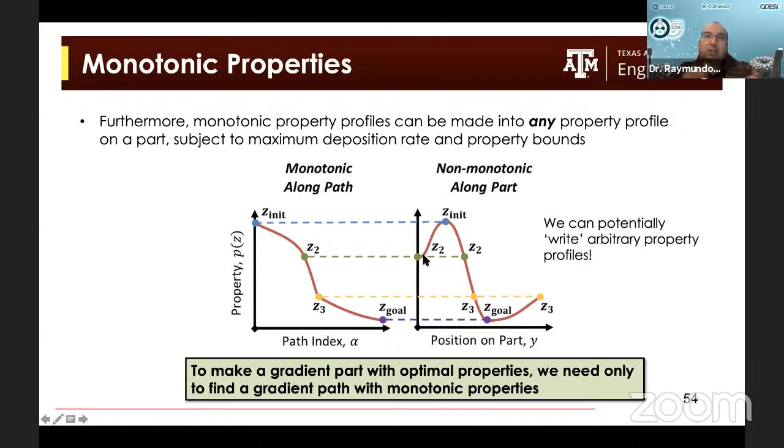So what we did was we looked at the iron, cobalt, chromium system. And the question was, can we actually find a path between this initial point and this goal point, minimize the obstacles, so avoid the sigma phase, and at the same time minimize or make the change in thermal expansion coefficient monotonic. So when we find the shortest path that avoids the sigma phase, this is what we get.

We have a non-monotonic change in the thermal expansion coefficient, and this change could lead to dramatic changes in thermal stresses, and that can result in cracking of the part.

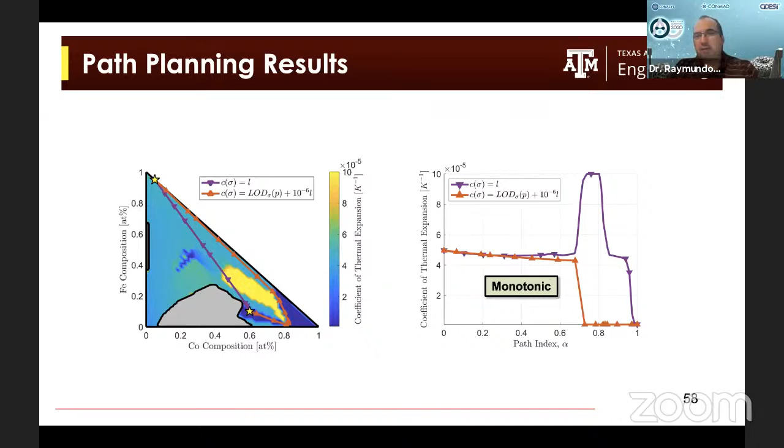So we know that we can do this, right? We have been able to do it for this particular property. But if you have property models that can predict the behavior of a material as a function of composition and microstructure, and you can predict the composition and microstructure as a function of path, you can use this framework to do property routing in a way that otherwise would be impossible.

So the future work that we have for functionally graded materials is process planning. It turns out that processing of compositional gradients is extremely challenging, because if you change the chemistry, you change the thermophysical properties, and if you change the thermophysical properties, you change the physics of printing. So in principle, every time we change composition, we actually have to potentially change the processing conditions to make sure we have optimal processing conditions for every chemistry we're trying to print.

We can potentially use thermal models to produce printability maps. This is work that we have done for powder bed fusion, but we are actually working right now to build printability maps for DED. The idea was to come up with post-process paths to predict optimal process parameters once we have a composition path.

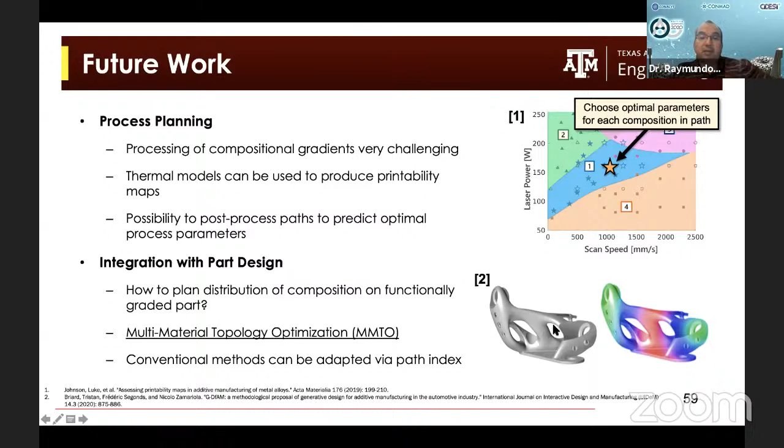The other thing that we are working on - and this is more evolved now because this is just computational work - we're trying to do multi-material topology optimization, where we change not only the topology or geometry of a part, but also the local chemistry and potentially the local microstructure to have tailored properties. So we're working on the mathematics and computational work related to this. Actually, when I say we are working, it is my student who is working on this. He's really, really smart, and he's actually doing something that no one else has done yet. We're very excited about his work.

So in conclusion, and I'm finishing a little earlier than I thought: 3D printing is on the cusp of transforming entire industries. It has transformed some industries already, and every year there's an industry being transformed a little bit more by 3D printing. The major advantages of 3D printing are the flexibility in design, mass customization, and the fact that you can create very complex shapes.

Even more transformative technologies than 3D printing could be achieved by going beyond 3D printing, exploring the potential of AM to do local tailoring of chemistry, microstructure, property, and/or function. But one of the challenges here is that if you want to do 4D printing, you have to have extremely sophisticated modeling techniques that allow you to model what is going to happen to the material when you change chemistry, when you change process conditions and chemistry, in a very reliable way.

So that is the forward problem. More difficult is the inverse problem. It turns out that sometimes these tools take a lot of computational time.

If we want to design a path and we have all these physics-based models to help us make predictions of what happens to a particular chemistry when you change the process conditions, if it takes too long, it's going to be quite expensive to design a path. So you either have to find more efficient ways of designing for 4D printing or functionally grading, or you have to find more efficient forward models, maybe with machine learning, neural networks, and so on, or do a combination of both. Develop machine learning models that can emulate physics-based models at a fraction of the cost, and also use advanced engineering optimization tools to minimize the cost of optimizing the design of these 4D printed or compositionally, functionally graded materials.